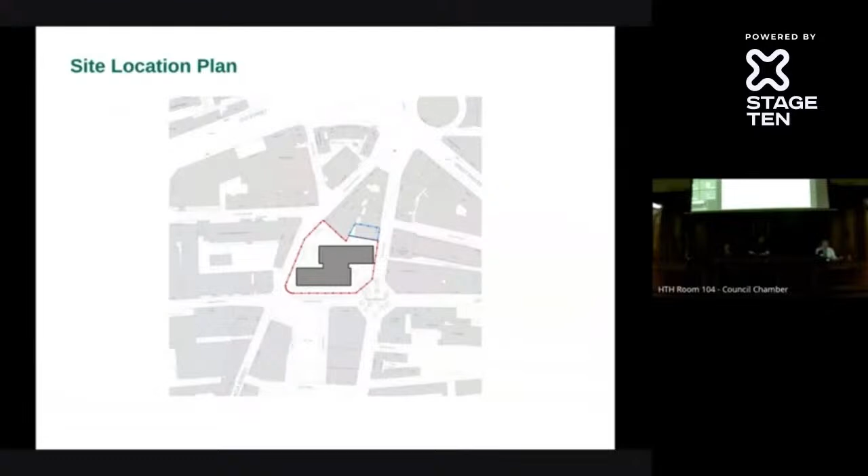Looking north, the site is on Leonard Circus in Shoreditch, taking up the southern portion of a block bounded by Paul Street, Leonard Street, and Tabernacle Street. The site is currently occupied by a post-war 7-storey office building named Telephone House, which is currently in use. Leonard Circus has recently been remodeled and provides a focal point in the neighbourhood with shared surfaces and street traders. The site has excellent transport links with a PTAL rating of 6B, and this is the Shoreditch Priority Office Area.

Looking south, the site lies within a mixed context of office, retail, and residential properties. Scales vary quite widely, but shoulder heights are predominantly 3 to 5 storeys, climbing upwards towards Old Street roundabout and City Road. Development House, which came to committee in May, lies directly to the south across Leonard Street.

This map from the design and access statement shows the relation to the site, with the borough boundary marked as the black line. Only the servicing yards to the north of the site are within Hackney's Shoreditch Conservation Area, shown in green here, which also borders to the east. In blue is the Bunhill Fields and Finsbury Square Conservation Area in Islington to the west. The Central Foundation Boys School is grade 2 listed to the west, here. St Michael and All Angels Church is grade 2 listed here, with a campus whose closest element is the grade 2 listed rectory building here.

As such, while the great majority of the site is not within a conservation area, the surroundings are sensitive in heritage terms.

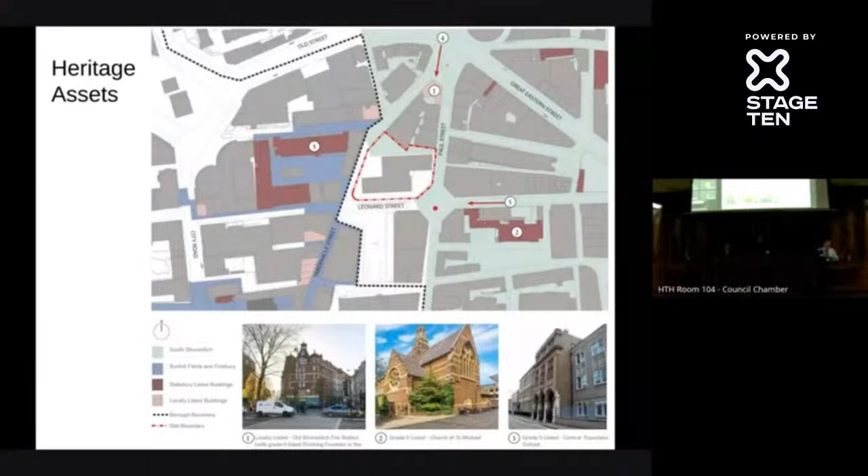The building is considered a negative contribution to the South Shoreditch Conservation Area. As a modernist addition to the streetscape, it has little relationship with the surrounding context, with the entrance leading to car parking fenced off from Leonard Circus.

The need for post-war reconstruction becomes obvious from this image on the left, showing the block in the 1910s, alongside the coloured map of World War II bomb damage, with the dark blues on this site and Development House showing the total destruction of the buildings on those sites.

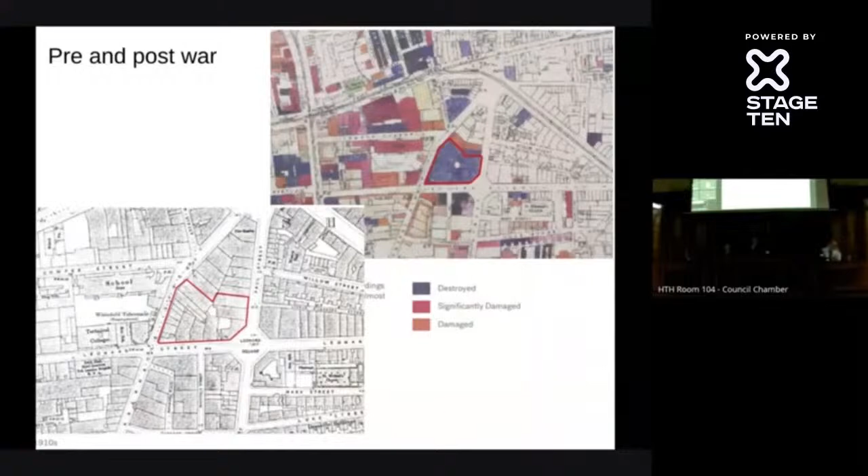The proposal involves an 8-storey frontage onto Leonard Circus and a 7-storey frontage onto Leonard Street, with setback floors above reducing the apparent massing from street level and allowing the formation of rooftop terraces. Negotiations during the application process have led to a scheme with differing facade treatments to break up the impression of the overall massing.

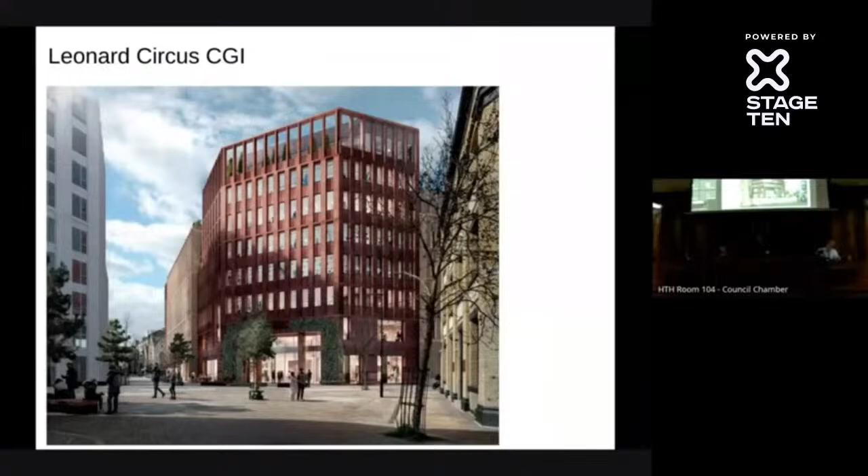The floor plans show the proposed uses and layouts. For clarity, this is the southeastern corner here, that fronts Leonard Circus, with Leonard Street along here.

Leonard Street along here at the bottom. The proposed basement of the building already exists under the much smaller footprint of the upper floors.

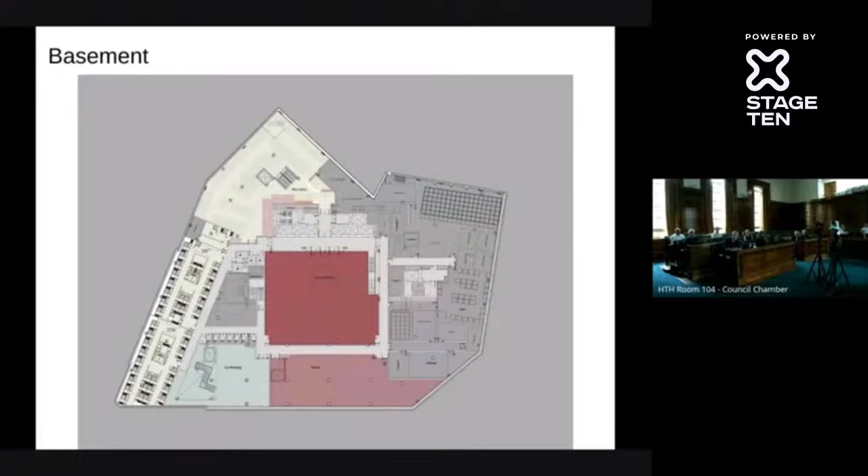Proposed at basement level, we see in the center of the image an event space. It seems likely that this space will be used in connection with the tenants of the offices above, but this is not yet clearly defined, and an event space within an open atrium, as here, will clearly be unsuitable for certain types of event. As such, we have required by condition that a management plan is submitted to provide details of exactly how the space would be used. A further condition limits the hours of use, and another important recommended condition ensures that noise breakout from the building would be 10 decibels or more below the background noise level at any noise-sensitive premises at any time.

Elsewhere on the basement plan, we see a large cycle parking area in the top left corner, accessed by lift or stair, with showers shown on the left-hand side of this image. The quantum of cycle parking is considered acceptable, but at present 92% of the proposed standard. Nevertheless, since the floor space dedicated to cycle parking, showers and changing facilities at the basement floor is extensive, we consider that the recommended condition will allow the overall quantum of provision and the accessibility of the spaces to be confirmed prior to the occupation of the development.

Also on this floor plan, we see a large plant area in grey, some co-working space linked to the floor above, and some retail in red, also linked to the floor above.

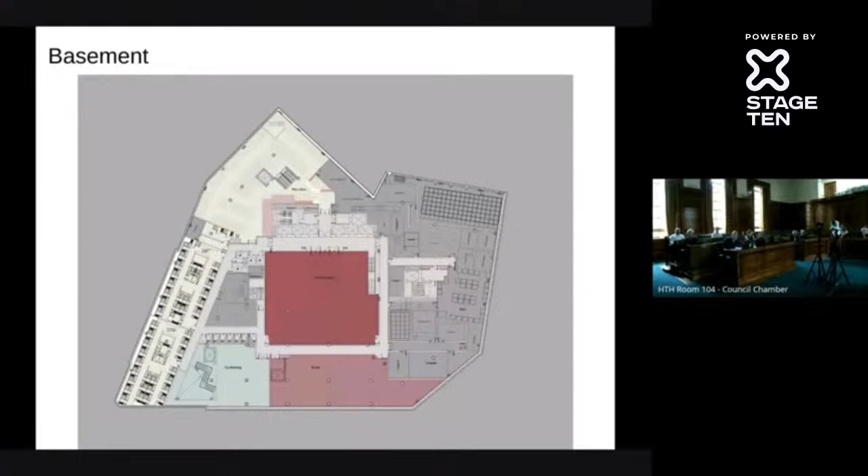Ground floor provides active retail frontages, shown in red, onto Leonard Circus, which is considered a benefit of the scheme in comparison to the railings and dead frontage there at present. At the top left, you can see a cycle cafe, which addresses Cowper Street.

The cycleway passes this entrance, and Cowper Street has been made a more important through route by the recent addition of a tube entrance to Old Street Station. The main entrance to the building is off Leonard Circus, as recommended by the design review panel at the pre-application stage, and it leads to the large atrium that includes the building.

The majority of this floor is shown in green as co-working space. This is connected but functionally separate from the office uses on the upper floors. The loading bay, shown in grey, provides off-street servicing for the building. It also provides 2 on-site accessible vehicle parking spaces.

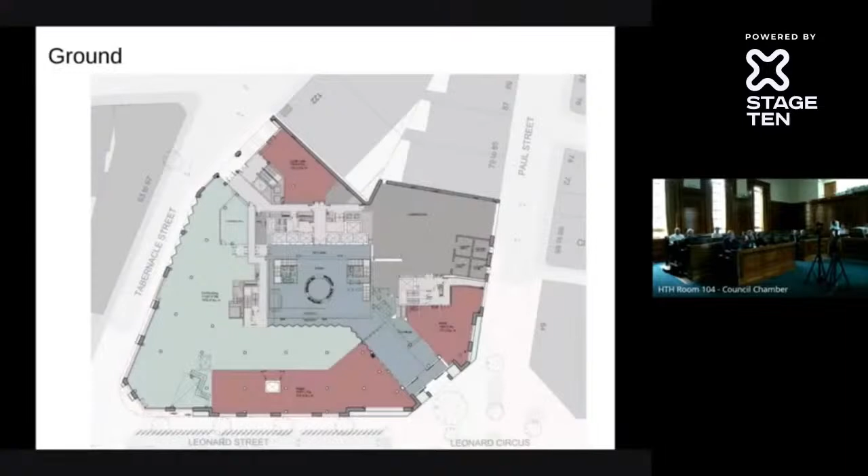The first floor shows a fairly typical floor plan for the middle floors, from here to 5th. The great majority of the building is to be in office use, as befits the priority office area location. The affordable workspace offer has been agreed with regeneration team colleagues and does not propose a separate area. Instead, 10% of the desks to be provided would be made available to affordable workspace users at a 60% discount on the rent portion of the advertised office price in perpetuity.

The offices are to be run by a familiar company in Hackney, Fora, who provide multiple amenity spaces and facilities for workers at the building, these space users. We consider that this is an acceptable arrangement and it's controlled by the proposed legal agreement.

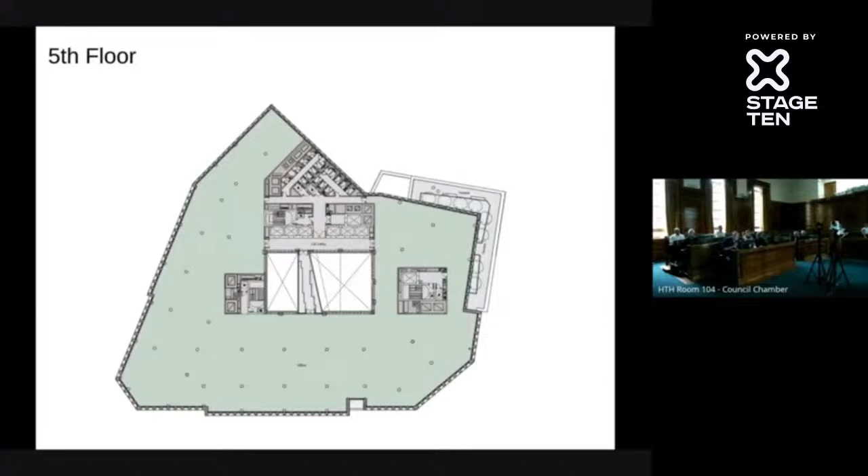Moving up through the floors, this is the second floor plan, and the arrangements are very similar at 3rd and 4th floors. At the 5th floor, following extensive negotiations with officers, the proposal has been reduced by a storey in height with multiple upper floor setbacks that are easier to read on plan.

Here at the 5th floor, the first setback, adjacent to the terrace at Paul Street, here, can be seen, with an amenity terrace for office workers provided. At the 6th floor, the proposal is similarly set back, adjacent to the Tabernacle Street terrace.

Further setbacks at 7th floor allow the massing to step down towards the terraces on Paul Street, while elsewhere it's now set back from the main building line.

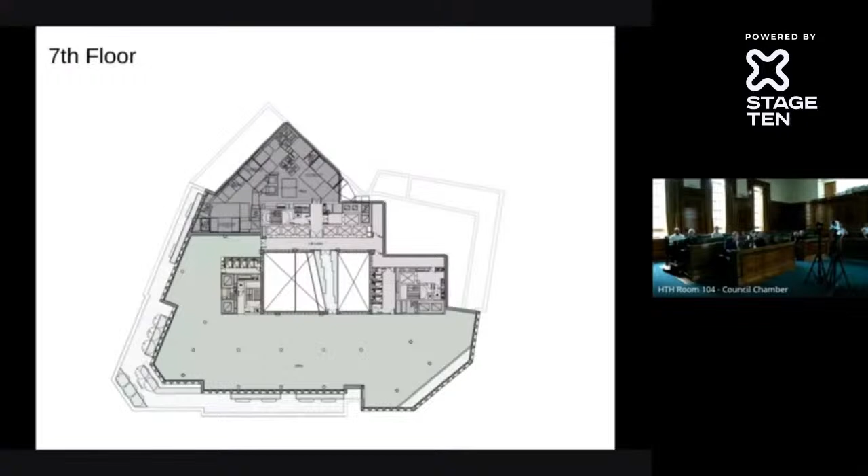At the 8th floor, the massing drops away at the corner of Tabernacle Street and Leonard Street. And the 9th floor is greatly reduced in size, being for plant only.

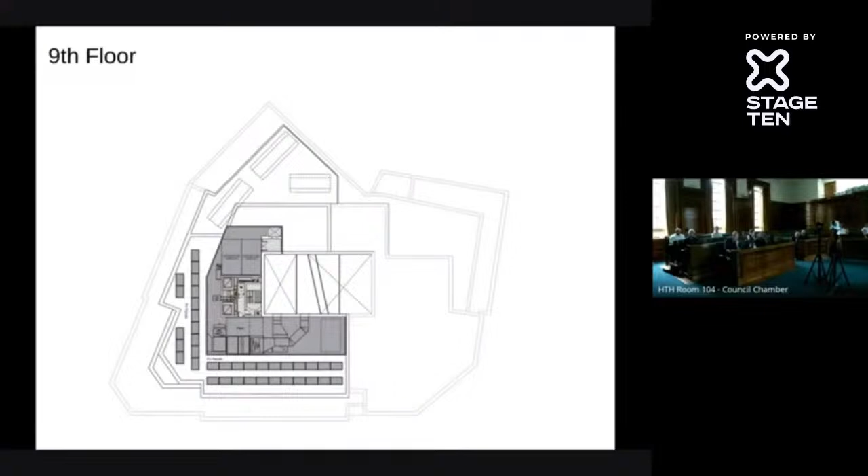The committee report also examines the amenity impacts of the proposal in detail. Many of the surrounding buildings are in non-residential use, which helps to mitigate the impacts. Even so, with regard to daylight and sunlight, two properties are shown to have significant impacts: 66 to 68 Paul Street here, and City Lofts on Tabernacle Street here.

The impacts to the nearest units of City Lofts are particularly significant, as has been pointed out in a number of objections to the scheme from occupants of that building. These units are single aspect studios at first, second, third and fourth floor levels. While the building was converted to live-work units at the upper floors in the 1990s, those units in

C3 residential use have become so by the use of certificates of lawfulness. As per the committee report, it's considered that the impacts to these City Lofts properties mostly result from the proposed building using a more typical amount of plot coverage than the existing post-war building, which sits in the middle of its site. While it's considered desirable in townscape and conservation terms that the proposal restores the historic building line, that does mean it comes closer to existing buildings than the modernist building it replaces. In that sense, the proposal is considered to fit adequately well within the existing urban grain, and the impacts to daylight and sunlight to the eight units in question are considered insufficient grounds to warrant refusal of the application. Nevertheless, that conclusion is reached on balance, and the committee will wish to consider this for themselves.

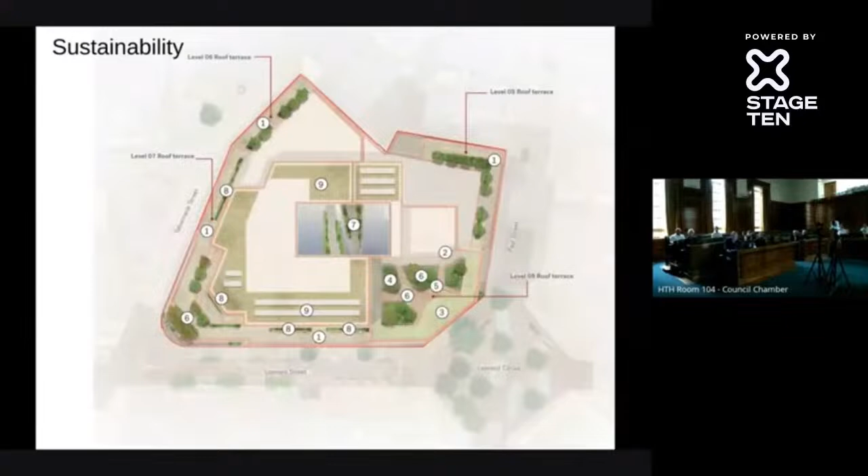I'll have to come back to that one.

Turning to the elevations, as laid out in the committee report, in design terms the proposal is considered to be of a very high quality, and following the reductions in scale during the course of the application and work carried out on the architectural detailing, it's considered to be of an appropriate character for this sensitive location.

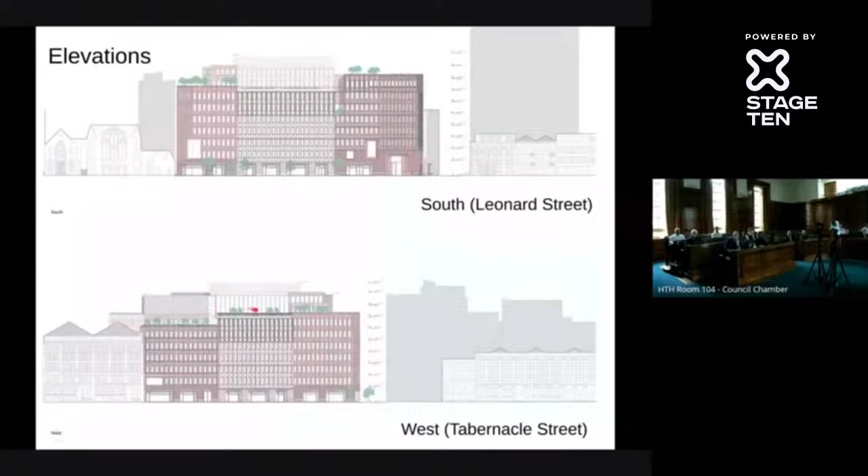The building is an increase in scale for the site, but would replace an existing building that is considered a negative contributor. From street level, the building will be experienced as stepping up from the terraces of Tabernacle Street, here,

and of Paul Street, here. Nevertheless, even at its greatest height, where it fronts Leonard Circus, the frontage of the building is a little lower than agreed recently for the Development House corner of the circus, as can be seen on the lower image here, on the left-hand side, where the consented Development House building appears.

The following slides show the proposal in the streetscape. This verified view shows the existing situation on Paul Street with Telephone House in the background. The proposed view demonstrates how the step-ins work to mitigate the impact on the terrace and how the historic street line is restored up to Leonard Circus.

The cumulative view also shows Development House in the background. This time the view is north up Paul Street, as a cumulative view with Development House again on the left-hand side. And the 49 to 51 Paul Street Hotel is in the foreground on the left.

The view on the corner of Leonard and Tabernacle Streets is particularly important because of the chapel on the left, which is a non-designated heritage asset within the conservation area, and the Grade 2 listed Central Foundation Boys School behind that. This is existing, and as proposed. The building is set back slightly from the red line boundary at this corner, which allows greater space for public realm and a better appreciation of the chapel building.

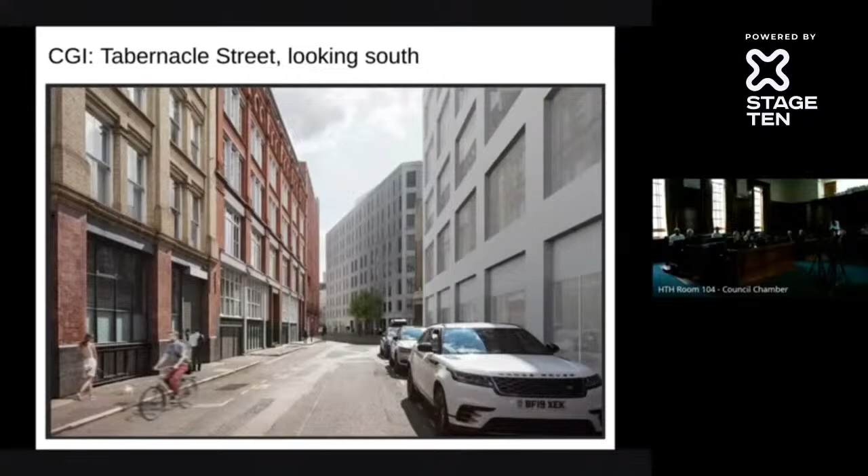The final set of views looks south down Tabernacle Street. Here the proposal is at the end on the left. It can be seen how it steps up from the Victorian terrace and relates well to the scale of the boys' school extension opposite. This is the same angle, but a view from closer up.

The Cycle Cafe can be seen at ground floor level, activating that section of the street.

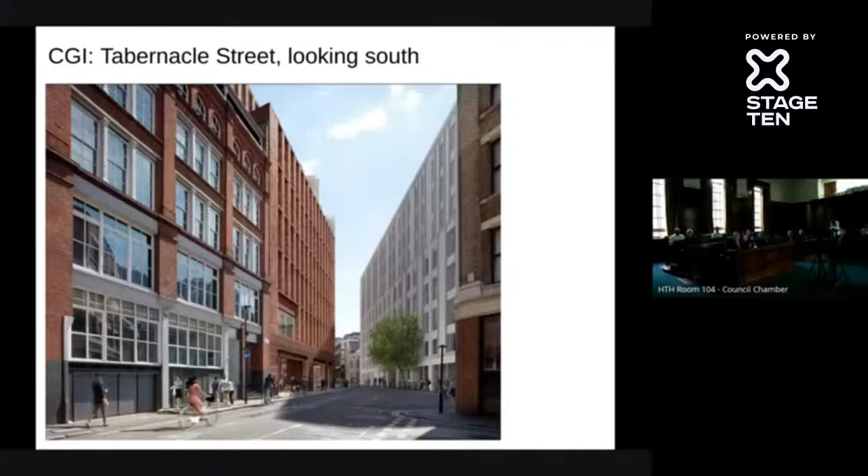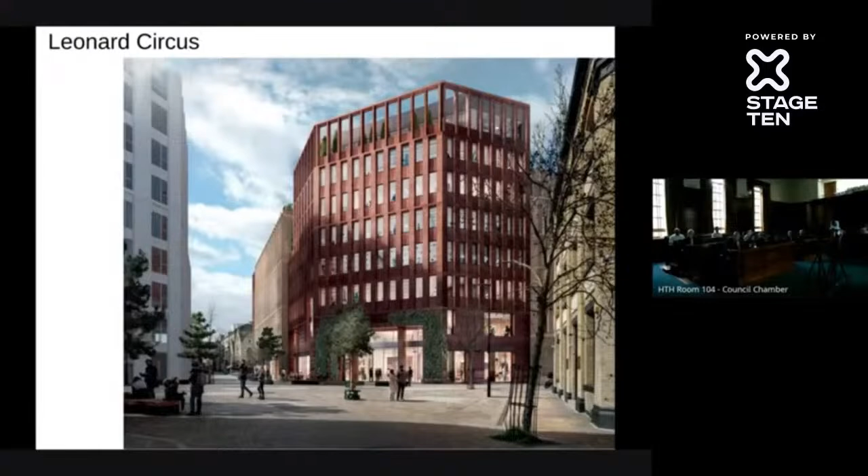The conclusion of this committee report is that with regard to public benefits, the proposal's high design quality, the increased level of employment provision and the activation of the Leonard Circus frontage, amongst other matters, would meet the public benefit test to balance against any less than substantial harm it causes to the setting of the heritage assets. Overall, the proposal is considered acceptable in conservation and design terms.

Turning to sustainability, the proposed energy strategy is considered very robust and to show a strong commitment to the sustainability agenda. It includes many energy efficiency measures, and there are a number of conditions to ensure the sustainability of the building is carried out effectively.

A BREEAM rating of outstanding will be achieved for the offices and BREEAM excellent for the retail. The building will use air source heat pumps and renewable technologies in the form of photovoltaic panels to be provided on the roof, which will help to meet electricity demand.

The scheme exceeds the minimum 35% reduction from the carbon baseline, achieving 45%, in line with the GLA and Hackney energy policies. The shortfall from net zero is 270 tonnes per year, requiring a carbon offset payment of £618,000 to be secured through the proposed legal agreement.

Since this is a referable scheme, the GLA have provided detailed scrutiny and detailed conditions in respect of circular economy and whole life cycle carbon. Controlled by the proposed conditions, the measures are in excess of local and regional policy requirements and are considered to be acceptable. In addition, the scheme delivers biodiversity net gain and a policy-compliant urban greening factor of 0.3, largely through extensive greening at the upper level terraces.

So to conclude, the proposed application is considered to be policy-compliant. The use is appropriate for the priority office area with its ground floor providing an active frontage onto Leonard Circus. The proposal represents a high-quality design that would enhance this sensitive site. As is detailed in the committee report, in these and other respects, the scheme is considered acceptable. It's recommended for approval, subject to conditions in the legal agreement.

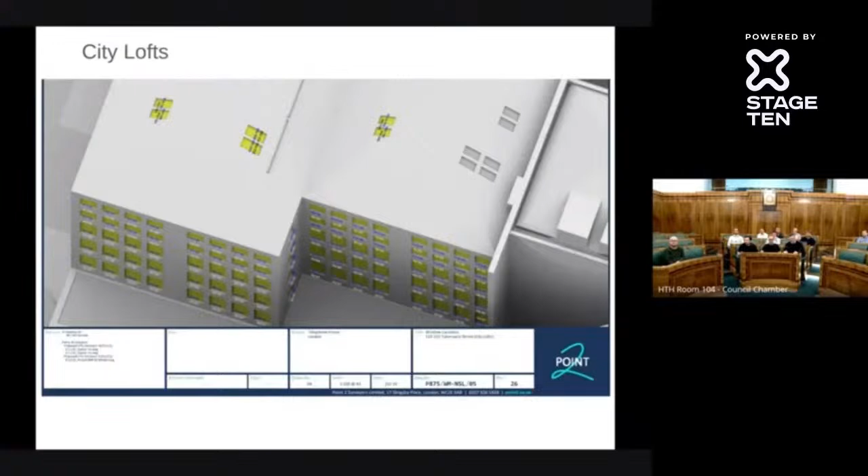Thank you, Nick. I was just going to suggest that we might also bring this condition back to committee if you wanted to see it, because its plan could be something that you had eyes on. Yep, I think that'd be a good idea.

For sure. So it's conditioned around times of usage, it's conditioned around noise. Is there any way that can be strengthened, or would bringing it back as a sort of operational plan be sufficient, do you think? I think that's sufficient. I think we want to have a look at it.

I think that if this space works as I expect it to work, which will be in conjunction with the office use, and Charles just mentioned that that's how they perceive it at the moment. The operational management plan might well be something that defines a use quite simply that is not going to have any impact. But it's there, we can have a look at it at the time, and we do have those noise conditions, and we can look at things like queuing at that. Yep, okay great, thank you.

I think it's fair to say that there's no expectation that we'd use it in ways that residents wouldn't necessarily like, but that's not to say that in the future, new owners of the building or operators might want to do something different. So I think it's fair to bring the operational management plan back, as part of this process as well.

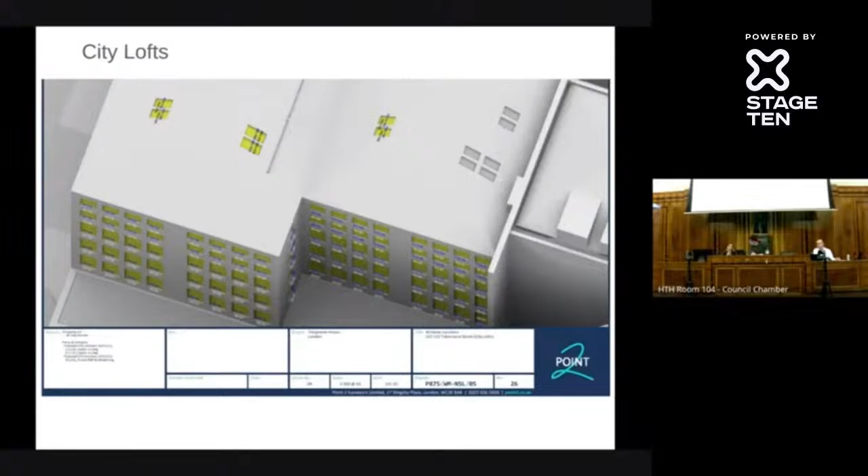So you'd have it go out to public consultation, I would have thought. Is that right, Nick? Or Natalie? It would be an item here, so you could object to it. So presumably there is a process by which it was a condition.

We can consult if we think it's appropriate at the time. So, for example, if it came in and it looked like something we thought needed consultation at that time, it could come back here and you'd look at it. Or if it was, as we maybe expect it will be, something that's relatively uncontroversial, we wouldn't necessarily need to do it at that time.

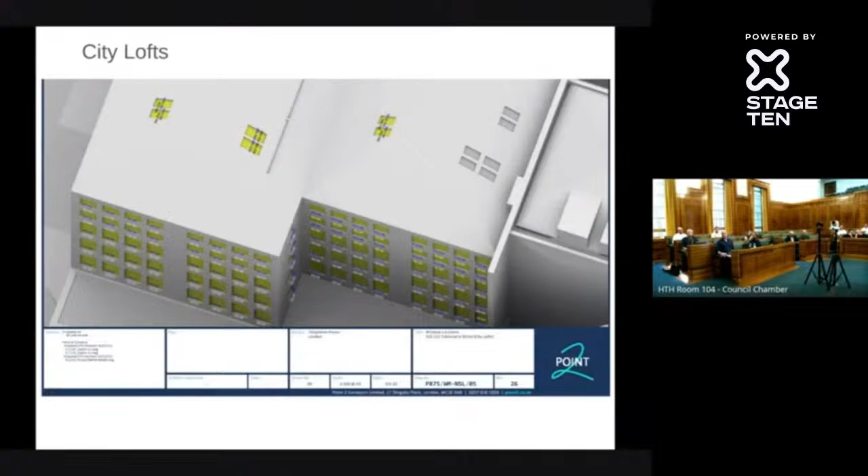Okay, could we commit here to doing the consultation, or would that be too much? Yeah, we have done that before. We've done that before, so let's do that then. Thank you, great. Indicate if there are any other questions on this.

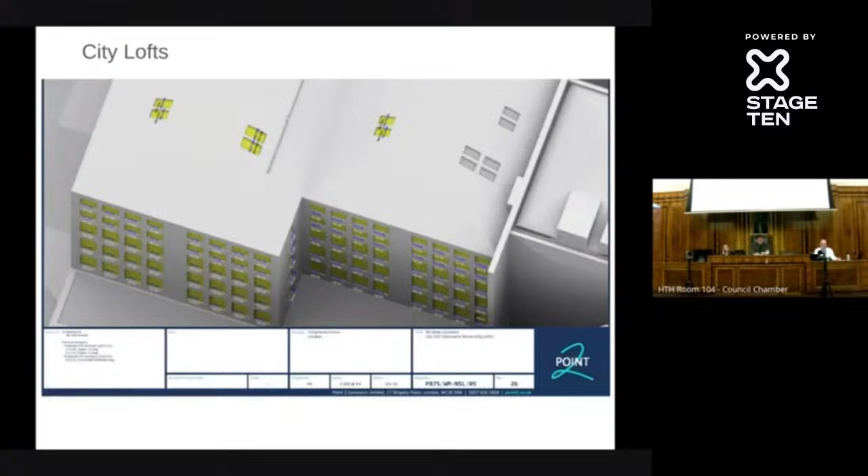I'll take Councillor Sadek. A quick follow-up on that event space, apologies if I'm not reading the diagrams very well, but I just wondered, is that only accessible going through the building into the event space? Yeah, there's no sort of public access.

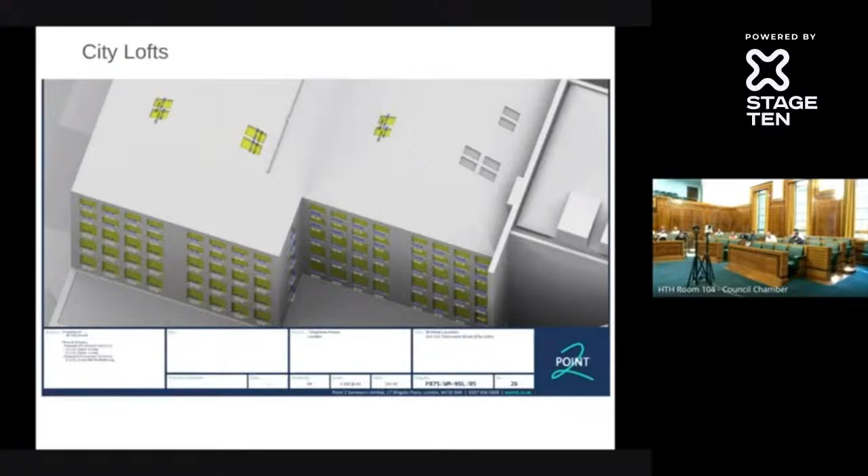Okay, and is it usual for an event space to be used in the way that you've described a moment ago, to be so relatively large as compared with the office space around it?

So yeah, this comes back to our understanding of how the sort of new ways of working with what we do with our co-working business, which we have. The examples there in the borough for you to see would be Montague Yards and on Rivington Street, which I mentioned when I was speaking. You'll see how in those buildings there's communal space, social spaces in the ground and lower ground that interconnect, that create a space for people to meet and gather.

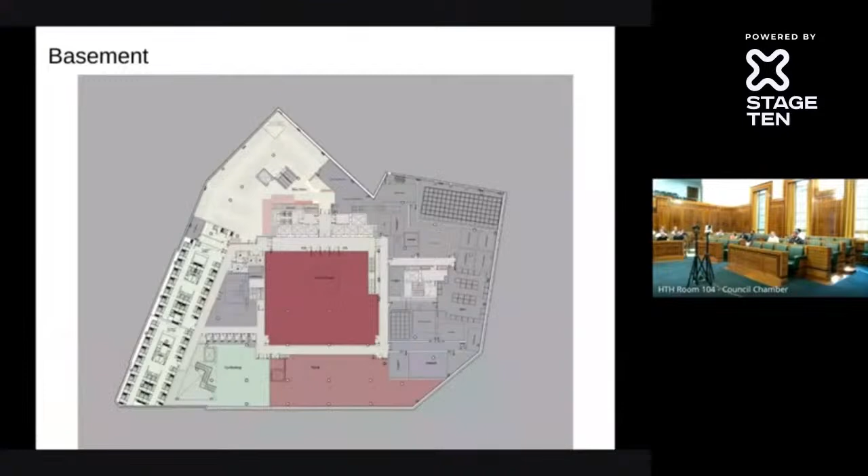More and more now we're seeing people don't want to just sit at their desk all day. They want to have 3 or 4 different moments where they interact, socialize, and then move through their day and have a more sort of energetic and creative work experience. So these spaces are kind of used as just free-flowing space to socialize and interact.

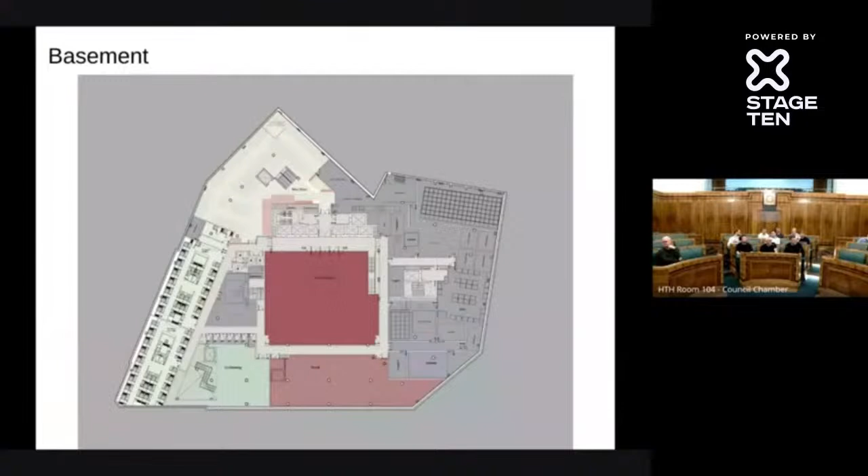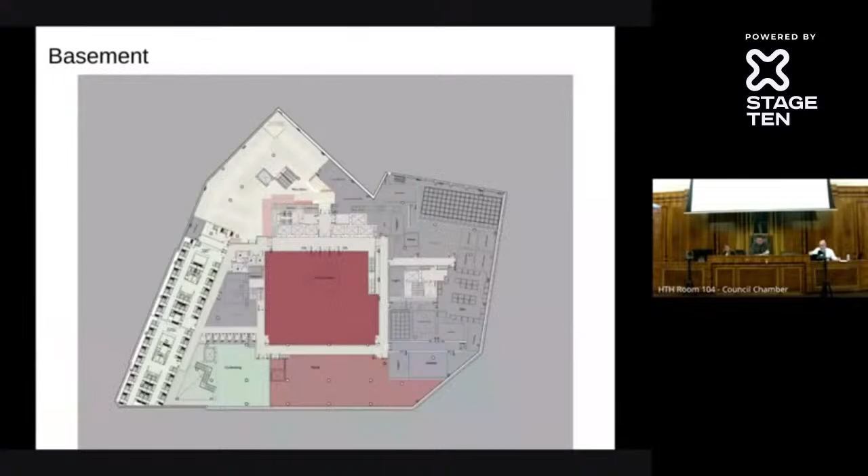Thanks, and then just one last question from me. The 8th floor setback, so this is 6.4.43. I recognise that the setback does ameliorate the sort of 8th story, but given the conservation area, why is the decision made that we go above the sort of median, 6 or 7 stories at the maximum of the area within the conservation area? What's the thinking behind that?

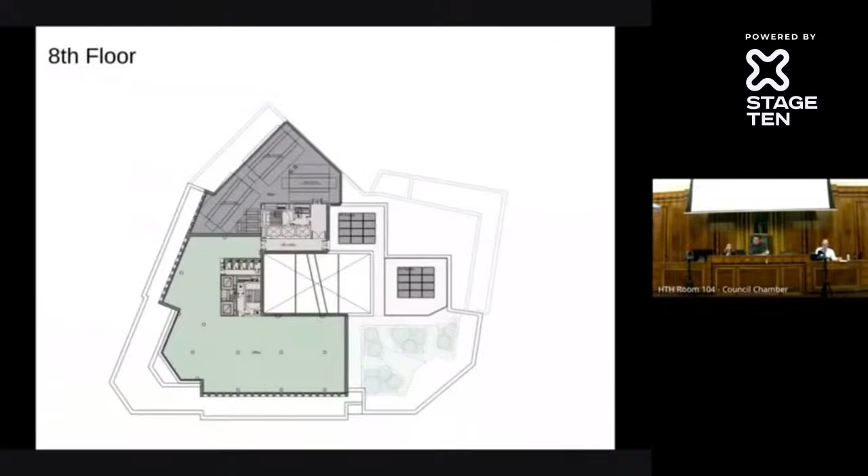I could answer that, but Matt - sorry, Matt hasn't answered yet, hasn't got to answer a question yet. So yes, let's do that.

Thanks, Nick. Yeah, so it is 8 stories on Leonard Circus. The site is outside of the conservation area, so there is a distinction on Leonard Circus. You've got east of Leonard Circus, which is the conservation area where the scale drops down, and then outside the conservation area to the west, where the buildings step up in scale. We've seen that with Development House, which is the site to the south, and other developments that are coming forward.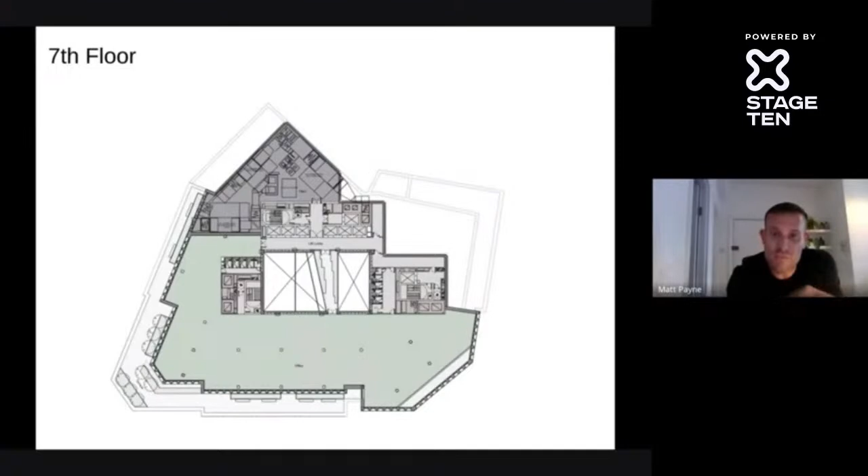So there is that distinction where it steps up, and it is still slightly lower than Development House on Leonard Circus. So that 8 stories is considered acceptable on that side of the quadrant. It does step up slightly, but we still think it's in keeping with other developments that have come forward in the area.

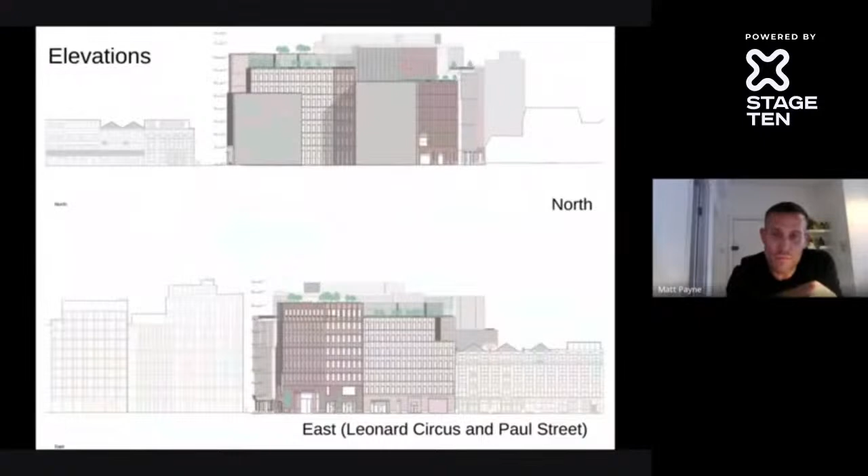Thank you. And then I think just the final point for me is around construction management plans. There was an application here a couple of months ago for Leonard Circus, at least one of the buildings in that area, and there's obviously a lot of development going on both on the Islington side and the Hackney side. So in terms of construction management plans and coordination of those through street scene, what's the process for that, and how can residents be sure that everything works together if they're being constructed at the same time?

Brian in our street scene team runs a monthly meeting with the various different people around that area who are building, and they get together and talk about problems and things like that. He also has, in the construction management plan, a number you can always contact for the people that you need to talk to. So if any issues come up, you can get hold of people and make sure it doesn't happen again.

And are we seeing the construction management plan back at the committee when it's developed? Not typically, no, because most of the expertise for this is in our street scene and highways officers, and they will manage it. It also goes via noise pollution and air pollution people as well, so they look at it and work with it. I'm not sure the committee necessarily would be.

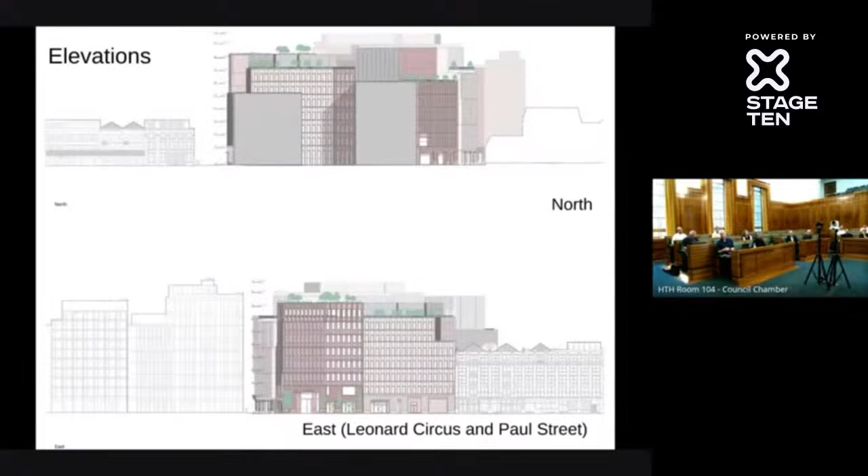Can I encourage the applicants to take great care of the cycle route through Leonard Circus in that case? That would be good. Thank you.

Any other questions? Okay, so obviously we've got residents here who are going to be impacted. There will be reasonably significant impact on some of those living places in terms of daylight, sunlight and light generally. But overall, that's one consideration, rightly, in combination with lots of other considerations of a relatively high quality building.

So do we move to a vote? Great, okay, if I get my piece of paper. The recommendation summary is to grant planning permission subject to conditions and completion of a legal agreement in relation to section 106 of the Town and Country Planning Act 1990, including the conditions we talked about this evening.

All those in favour, please raise your hands. Thank you, that's unanimous. Okay.

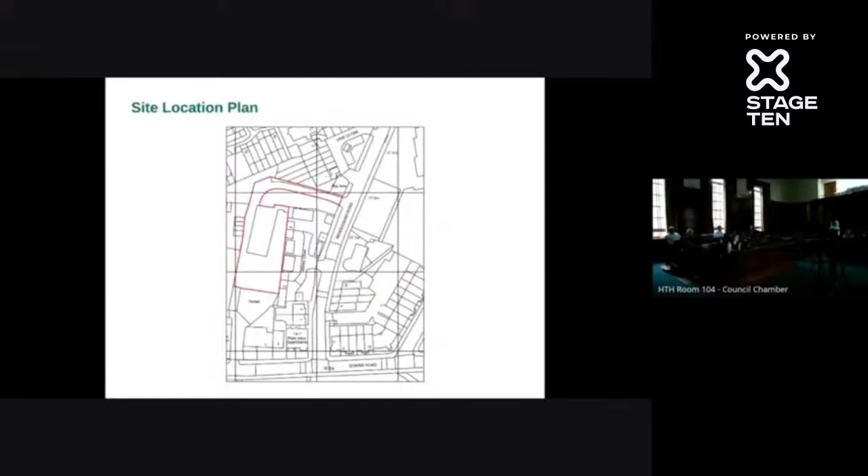So this is the location plan. As you can see here, it's just to the north of Hackney Downs, adjacent to the new Park House development at 1A Downs Road, shown there to the west. The site is in a priority industrial area, but is predominantly surrounded by residential buildings to the north, east, south and west, including the Gypsy and Travellers site to the immediate east.

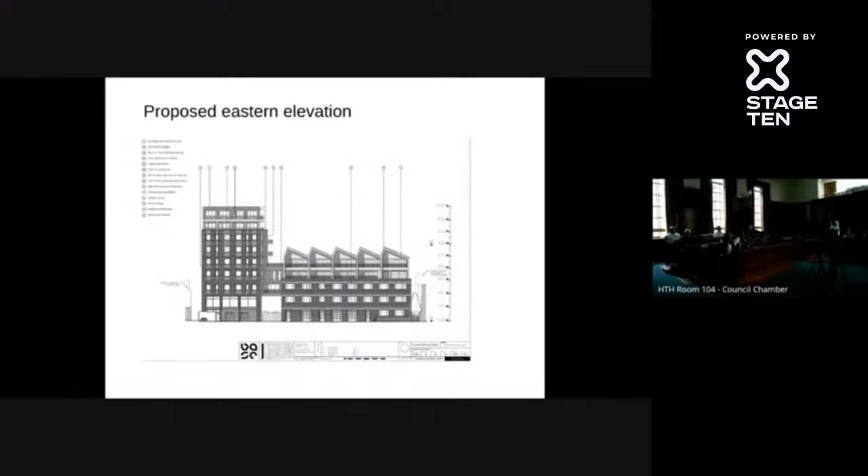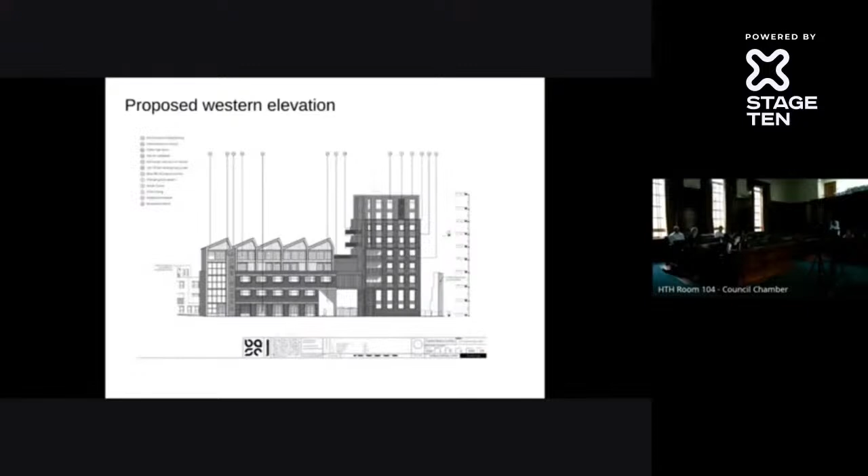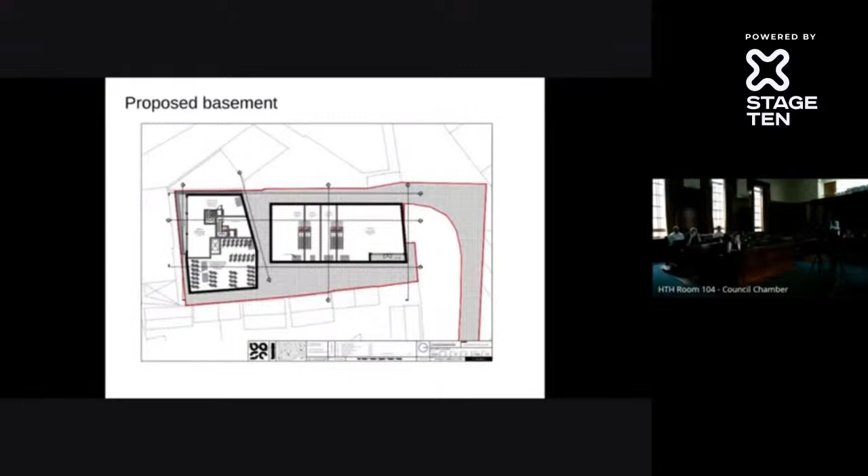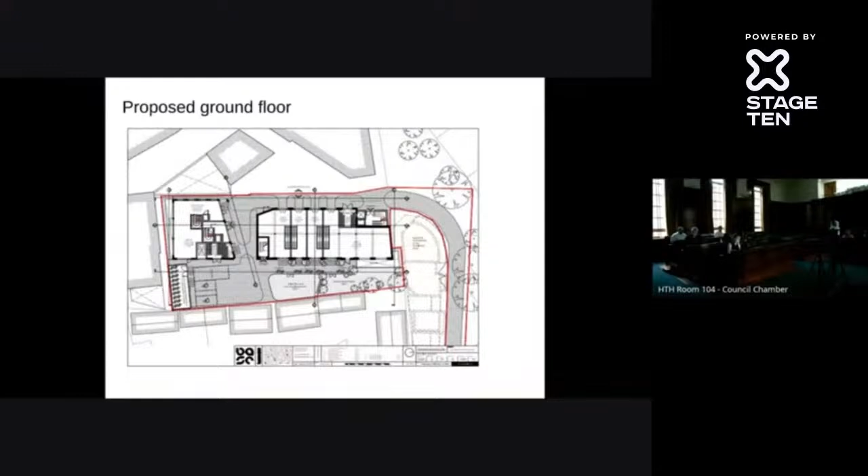This is the proposed ground floor, new industrial commercial floor space in the new building. This is an existing floor in the retained building. I think 9 or 10 undersized residential units on this floor, which will be modified and enlarged to meet space standards. They're currently lawful due to passage of time.

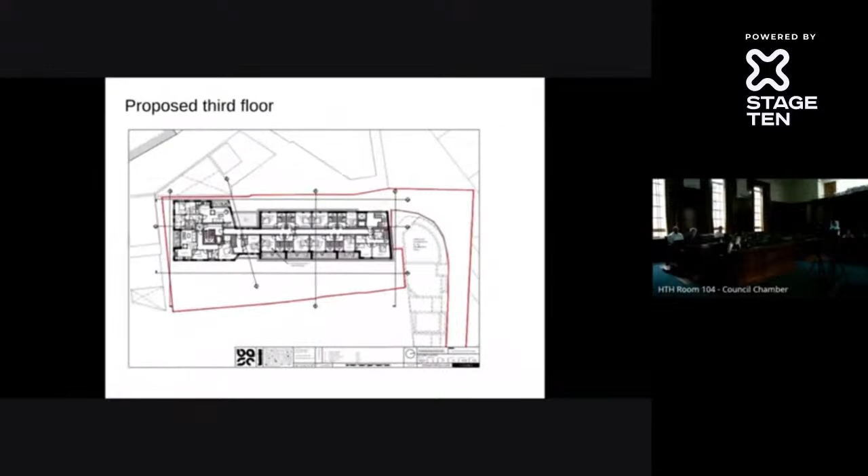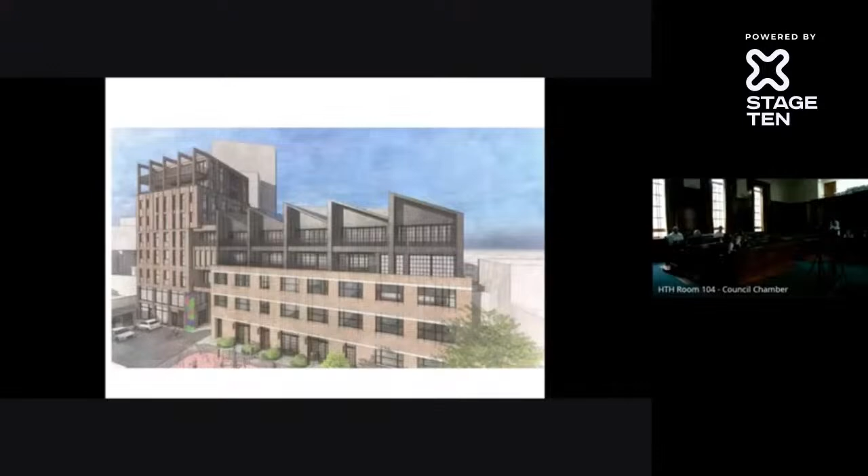The proposed second floor shows the proposed residential units. Third floor, proposed residential units again, and then 4th, 5th, 6th, 7th, and 8th. So these CGIs are slightly old—they were done for the original development before we had some changes made to the fenestration and the sawtooth roof in particular. It was more stories, but it's now only 2. But it gives you a pretty good indication of the overall design of the development.

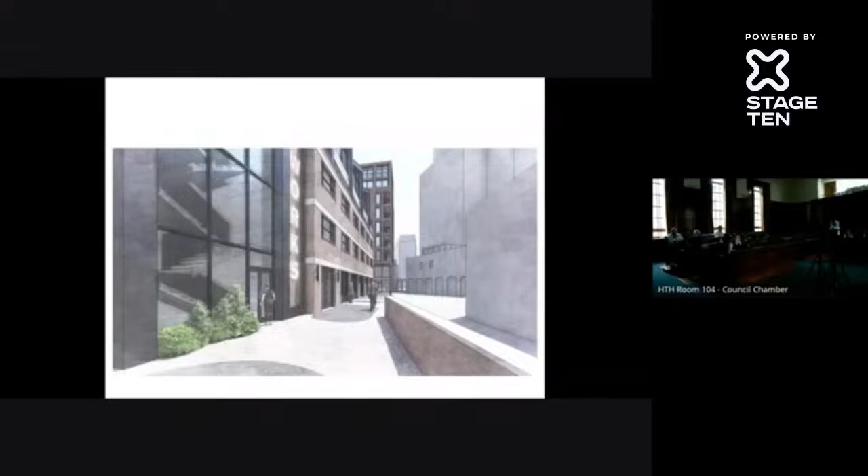This is a CGI showing the new shared surface that will come off Rendlesham Road and around the back of the building to provide access. And then this final CGI shows the shared courtyard to the east of the retained building.

It's considered that the proposal provides a high quality development, maximising employment floor space and providing 25 new units for a total of 32 on site. Just to mention the addendum, it provided an additional paragraph on public sector duty, a condition for screening, and the 2 employment interests.

Thank you. Sorry, Chair. I think, Richard, you want to grab your mobile phone. So just before we get to Kate.

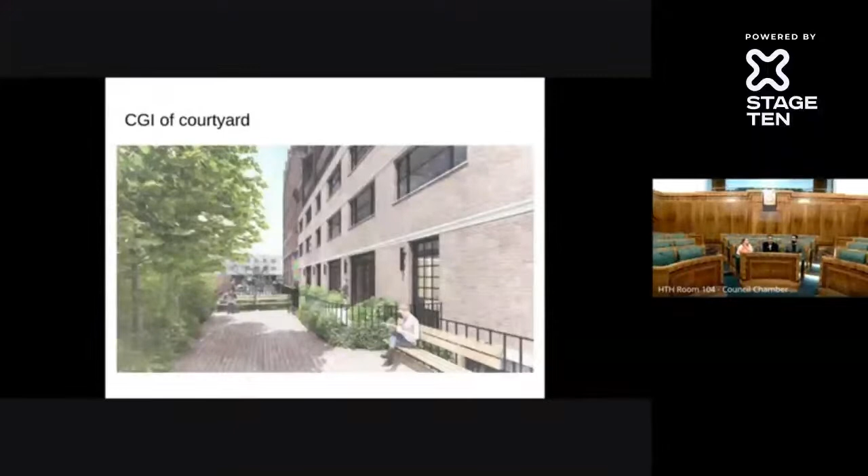Yeah, to be fair, most of my question was just asked by Councillor Sadek, but just on that point about mitigating the impact of the industrial on the residential - obviously you said that principle's already been set by there being residential there, but if this was a new scheme, is the level of mitigation proposed satisfactory? Would you be happy, not knowing exactly what the industrial use would be on the site?

Yes, I think the conditions recommended by our Environmental Protection Officer, including background noise and insulation, are sufficient, pretty much to enable the industrial uses to continue while there are residents on site.

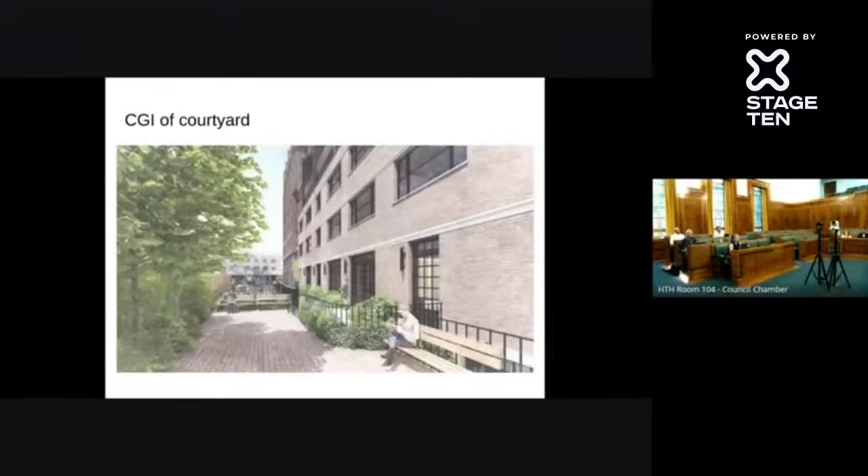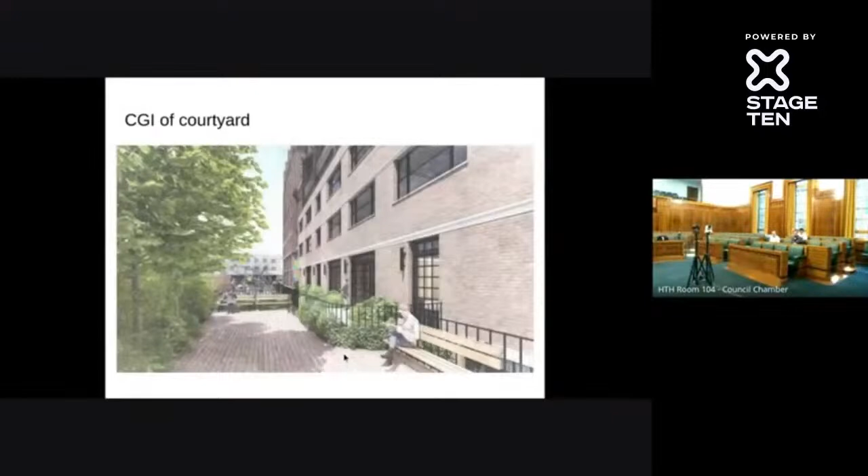Okay, great. Any other questions? No, great, thank you. In that case, let's move to a vote. So the recommendation summary is to grant planning permission subject to conditions and completion of a section 106 legal agreement. All those in favour, please raise your hands. Thank you very much, that's unanimous again. So thank you to the applicants, thank you to the officers.